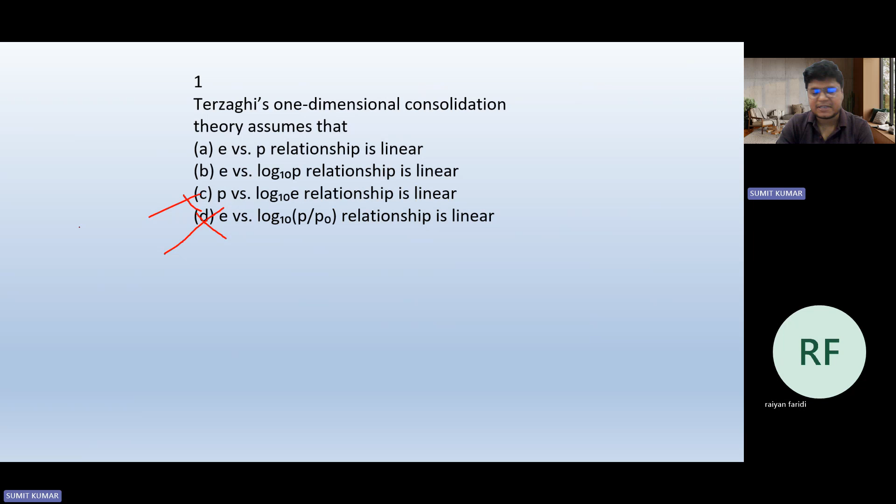As we move forward, you will see AV is delta E, that is change in the void ratio, divided by delta P. Then we have the coefficient of volume compressibility, that is MV. MV equal to AV by 1 plus

E naught, where E naught is the initial void ratio, and CC and CR, depending upon whether it is the compression index or recompression index, each delta E upon log P2 by P1. Maybe at some point I could write something wrong, but I feel this might be log P1 by P2, but as I recall, it's log P2 by P1.

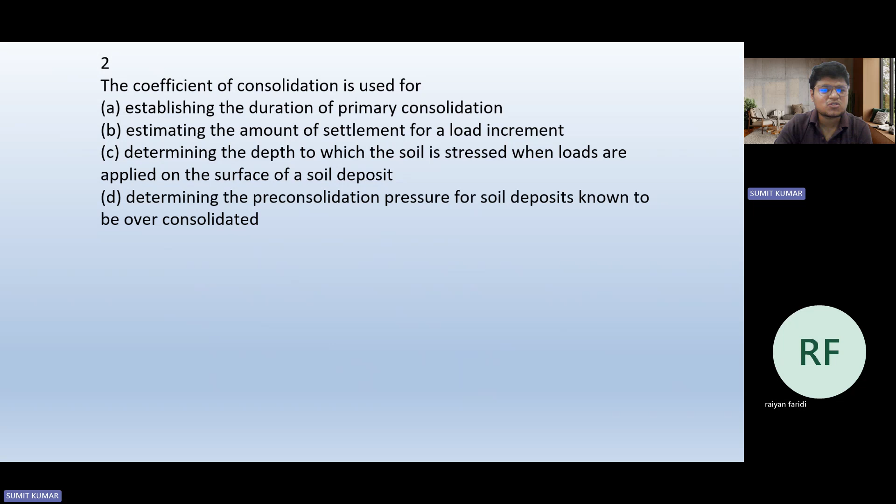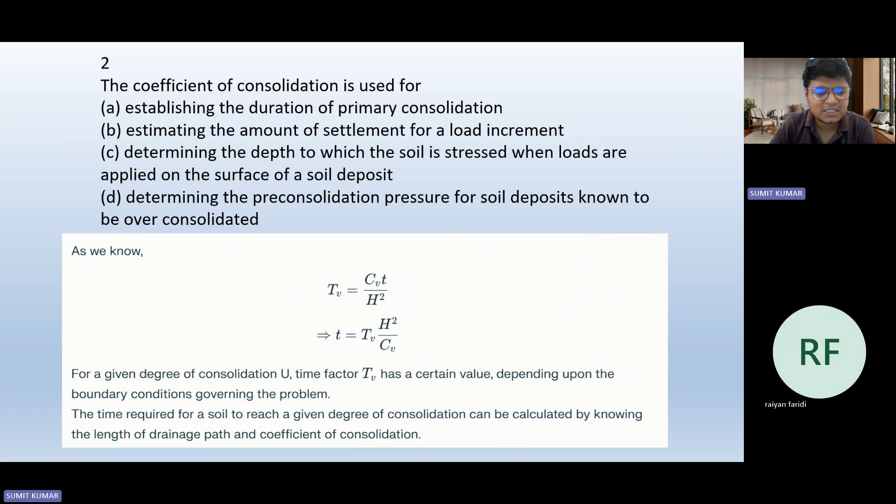So for this question, the option number A or B should be correct. Let me read once again. The question says the coefficient of consolidation is used for establishing the duration of primary consolidation, or establishment of amount of settlement for a load increment. So option number A will be correct.

Next is the true/false question, in which it is asked that 50% of the consolidation at a site subjected to a stress level of 200 kPa occurred in 2 months. If the site had been loaded to 400 kilopascal, the 50% consolidation would occur in 4 months. Now see, it's a very simple, very basic question.

Suppose, let's take an example that you have applied 1 kilonewton of load to move an object from one place to another, and it will take t amount of time. So if you applied 2 kilonewton of load instead of 1 kilonewton, to move that object from one place to other, it will take less time, not more time.

That is, it could take t by 2. So basically it is not related in exactly that manner, but from common sense also, you could not say that when you increase the load from 200 to 400, the 50% consolidation settlement achievement takes 4 months. If you apply more stress, it should take less time than earlier. So this is clearly false, and I don't want to go into detail now, because as we move forward we will solve more problems and this will be clear to you. But these type of problems come in many competitive examinations, and students don't think critically, and they mark the wrong option.

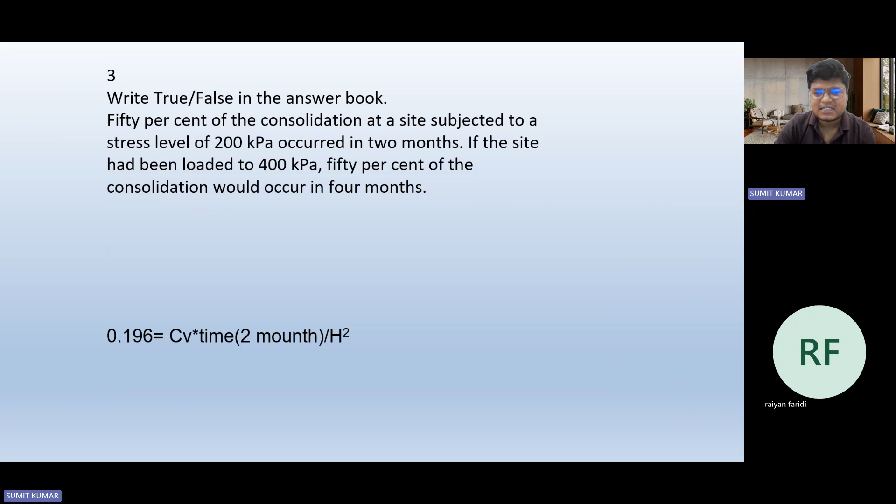So I will suggest that you read the question very carefully. Sometimes in a question, just by reading it you need not touch the pen, and you would be able to answer the question. So this option is the false statement. And the relation which we used, if you remember, in some class I have shown you that...

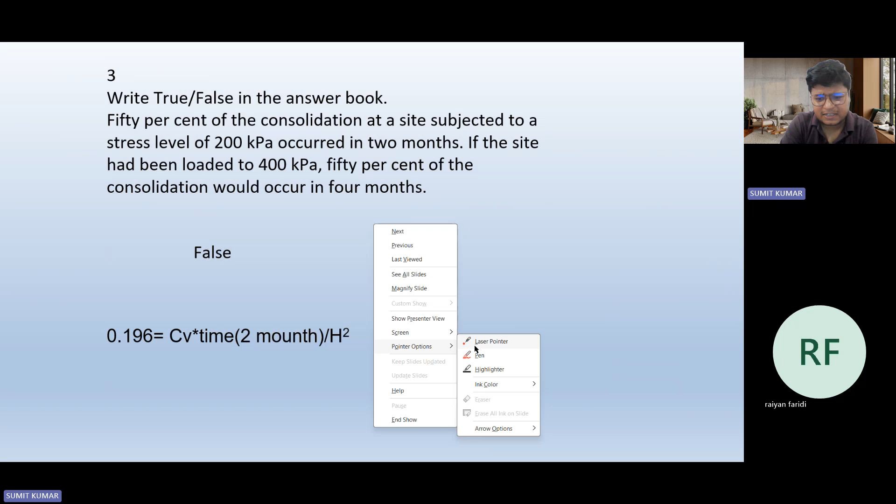For 50% consolidation settlement, Tv value is Tv equal to Cv into T, where Cv into T by D square, where T is the time, and this Tv is 0.196 for 50% consolidation settlement. For 60% it is 0.283, something like that, as I recall. And for 90% it is like 0.848 or something.

Just check once. This is there in the table which PDF I have shared in the last to last class, so just check once. And these values, how we have calculated, we have elaborated over there. But as we move forward in this class, we will discuss this again and again, because many problems come on this topic only. That's why I write this formula many times, so that it will be remembered by you.

So moving forward you could be able to answer the problem associated with the same, right? Now, this is the first statement and how you have understood. So if you go for any examinations, specifically the competitive examination, you see many of the problems don't require you to touch the pen or to solve anything. Just read the question and answer the question and move forward.

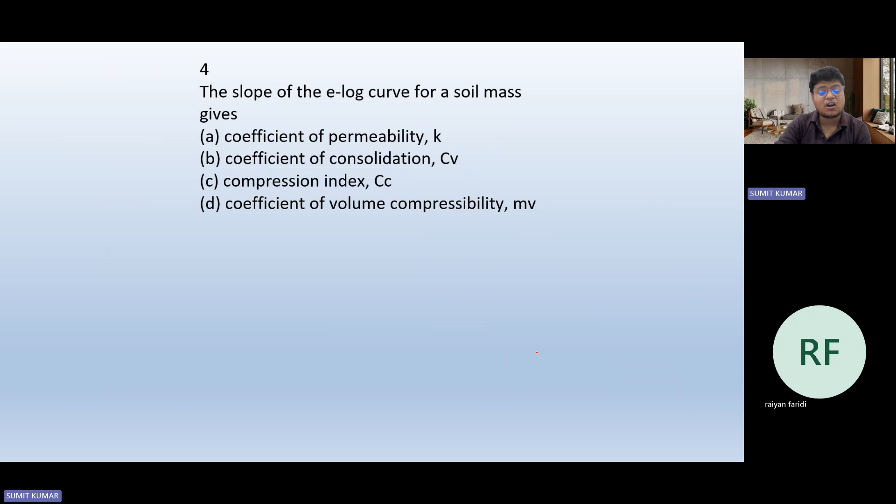Now over here, the next question says the slope of the e-log curve for the soil mass gives Cc value, compression index. How? Let me show you. If you remember, I have written some of this in this class only. In this class only, I have written Cc equal to delta e upon log P2 by P1.

When we plot these graphs it comes to be linear, but when we plot this in terms of e versus P, this comes to be some arc, maybe an arc of a parabola or something like that curve. So over here, if you recall the last to last class, over there we have shown the figure as well, in which we have shown that this relation comes to be linear for the log curve, e versus log curve, while this linear relation comes to be in the form of an arc when we plot e versus P, or e versus sigma, whatever you want to say.

Right. Now the next question says sand drains are used to: reduce the settlement, accelerate the consolidation, increase the permeability, or transfer the load. So if you read this, you could say that it could lead to reduce the settlement, but whether it is possible that the settlement is reduced due to... in the due course of time, it could not reduce the settlement.

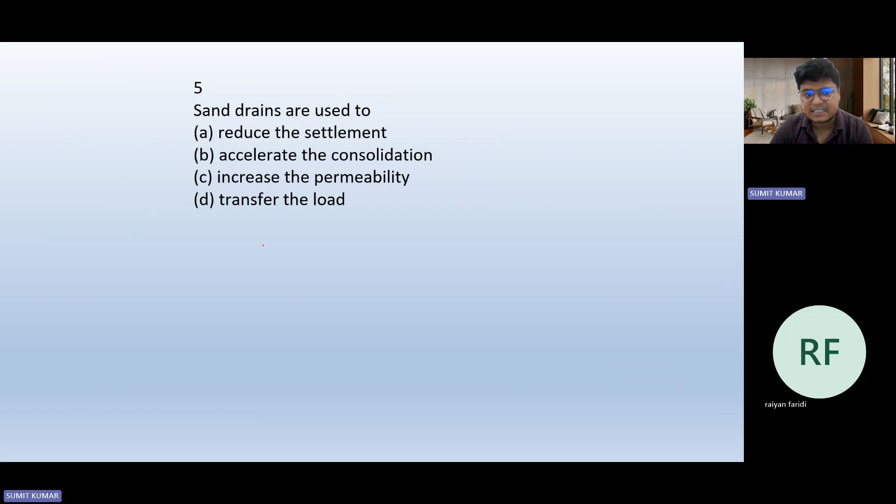Yeah, accelerate the consolidation - if you remember, in the previous class I have drawn a figure, a table in which I have shown that the clay layer is there, above that a sand layer is there, and below that also a sand layer is there. In that circumstance, the settlement takes place at a faster rate, that means the water flows out from there at a faster pace. But in the same scenario, if you remember, we have also said that if below that clay layer some impervious layer is there and above that clay layer a sand layer is there, the consolidation settlement takes place, but the time taken by the consolidation settlement gets increased.

So option B seems to be correct. Now see option C - it says increase the permeability. You can't increase the permeability of a specific soil in any circumstances, and then transfer the load is not part of the options at all. So option B is the correct answer.

This elaboration is sufficient, and some points are written. Let me read it: the slow rate of consolidation of saturated clay of low permeability may be accelerated by means of vertical sand drains, which provide radial drainage, resulting in shortening of the drainage path. Consolidation is then mainly due to horizontal radial drainage, resulting in faster dissipation of excess pore water pressure. Now let's move to the next problem.

This problem I discussed in the previous class, but I could not speak fluently and I feel I could not convey my point properly. So let me read this question again and elaborate.

For curve 1, it reaches a specific value, then the axial strain increases, but sigma 1 minus sigma 3, that is the shear stress parameter, remains constant for the increase in axial strain, or may even reduce.

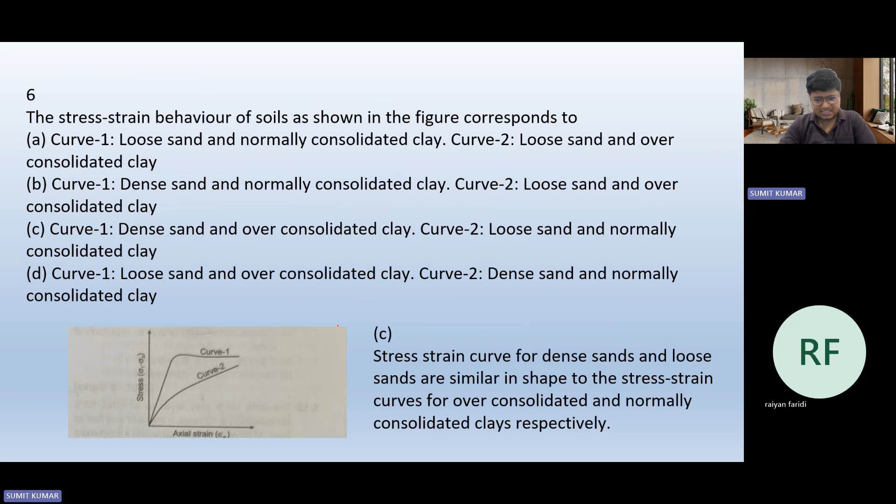Now the next problem: the time for a clay layer to achieve 90% consolidation is 15 years. The time required to achieve 90% consolidation if the clay layer were twice as thick, 3 times more permeable, and 4 times more compressible would be?

The answer I already solved over here. Let me show and discuss it, because due to time constraints I don't want to take too much time, as I have to discuss many things. Otherwise I will write with pen and paper and elaborate separately, but if needed, I will write.

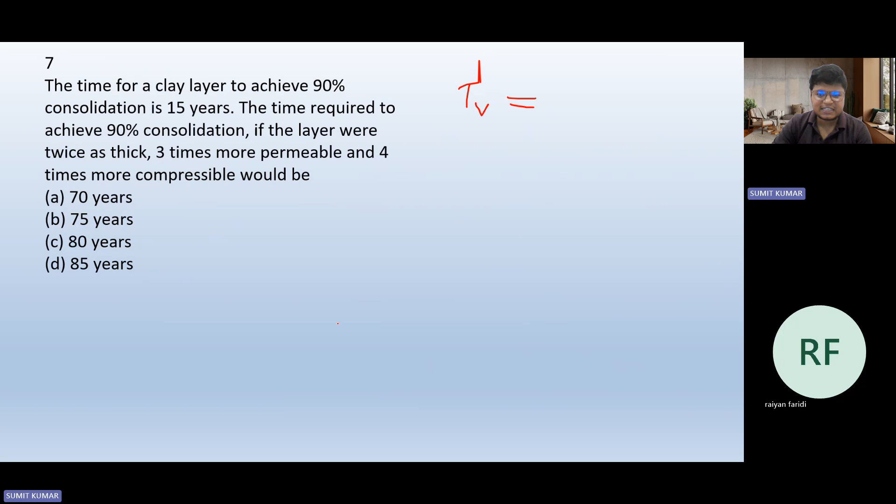If you remember, I have written this term many times: TV equal to CV into T by D square. Now, the question says 90% consolidation. If you remember, for 90% consolidation, the correlation is TV equal to, let me write that.

Which option is there? If you remember, TV equal to 1.781 minus 0.9332 log of (100 minus percent U). If you calculate this, keeping U as 90, this value comes out to be 0.848, as I recall.

Okay, so TV is known to us. TV 0.848 is constant. Now the question says that to achieve 90% consolidation, the time for the clay layer is 15 years. It takes T equals 15 years.

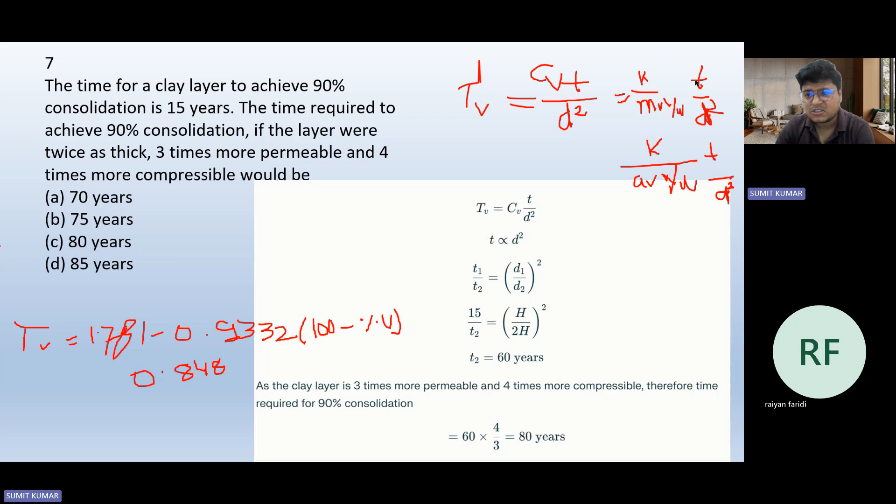But you need to understand that solving in that manner will give a more precise answer. So I suggest this formula will be there; you solve in that way and you will get the answer as given here, or maybe something different. I could not see the answer script, but during solving I think I missed out things like permeability and compressibility. So I will solve and put the answer over there. If I'm not able to solve, the question and the formula I have written will be there, so I suggest you solve using these concepts and you will get the correct answer.

Now see the next question: consolidation in soil is a function of effective stress. Absolutely right, it does not depend on the pore water pressure alone - that doesn't make sense if it's a function of effective stress, because effective stress is also a function of pore water pressure, since pore water pressure could be subtracted and is a function of total stress. So option A is the correct answer because effective stress fulfills both the pore water pressure and total stress relation, since total stress minus pore water pressure is the effective stress.

So the correct answer is option A, and the explanation mentioned is that Terzaghi stated that effective stress controls the behavior of the soil like the compression and the strength. The compression is a function of effective stress. By using the principle of effective stress, Terzaghi derived the consolidation theory for saturated soil.

Now move to the next problem. The next problem says identify the two false statements from the following four statements. The first statement is that consolidation of the soil happens due to change in total stress, effective stress basically - this is not right in the true sense.

When the standard penetration tests are performed in fine sands below the water table, the dilation correction is applied after the overburden correction. Maybe the next point is that over-consolidated clay will have predominantly cohesive strength as compared to frictional strength - you could say that.

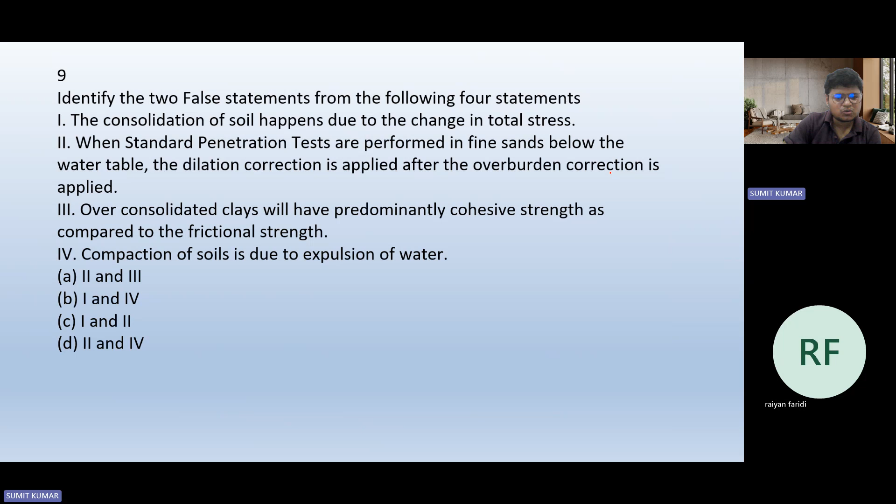But the compaction of soil is due to the expulsion of water, so option 4 is correct... wait, option 1 is correct, that consolidation of soil happens due to change in stress. So option B is correct over here - sorry, option 4 is false and option 1 is false.

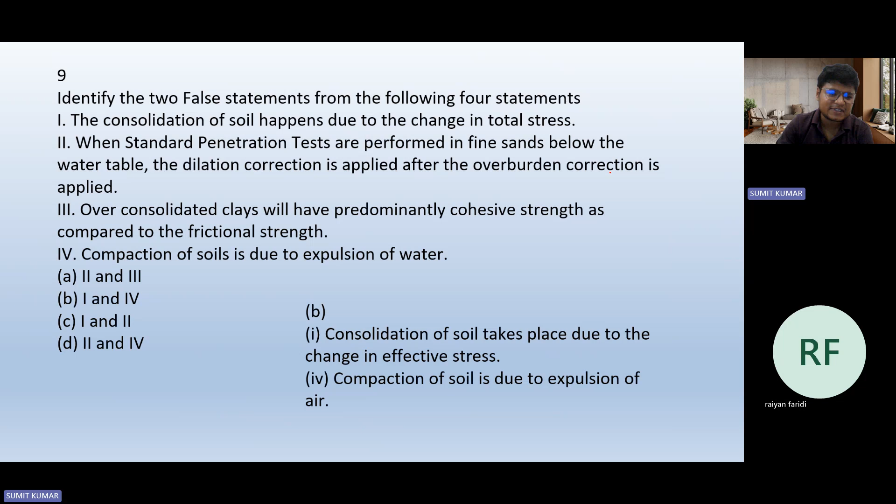Option 2 is correct and option 3 is correct, because when the standard penetration test takes place, we perform the dilation correction, and in option 3, over-consolidated clay will have predominantly cohesive strength as compared to frictional strength. This is because in over-consolidated clay, the clay body has been compressed to such an extent that the stress applied in the present situation is less than the stress applied in the prehistorical time at that specific site. So these two statements are correct, and option 1 and option 4 seem to be false.

Now the next question says the time for a clay layer to achieve 85% consolidation is 10 years. If the layer was half as thick, 10 times more permeable, and 4 times more compressible, then the time required to achieve the same degree of consolidation is...

Okay, no problem, let's see. Over here, what I have discussed earlier is mentioned in that manner only.

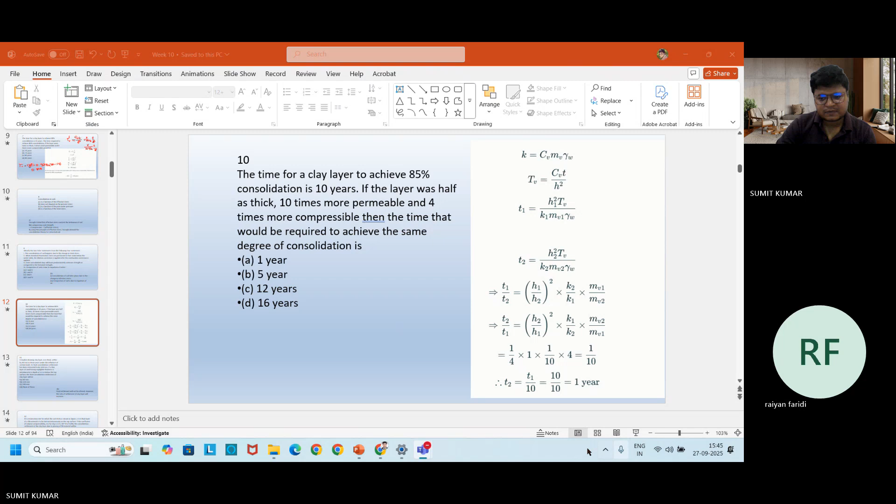Now see, over here it is mentioned that the time for a clay layer to achieve 85% consolidation is 10 years. If the layer was half as thick, 10 times more permeable, and 4 times more compressible, find the time required to achieve the same degree of consolidation.

As I mentioned earlier, TV equal to CV into T by D square, and CV equal to K by MV gamma W. From this equation, K equal to CV into MV gamma W, that is, CV equal to K by MV gamma W. So TV equal to CV into T by H square. If we write CV as K by MV gamma W, then T is related as H1 square into TV upon K1 into MV1 into gamma W.

Now for time T2, which we need to calculate: H2 is half of H1, since the layer is half as thick. It is 10 times more permeable, so K2 by K1 is 10, and 4 times more compressible, so MV2 by MV1 is also 4. When we calculate, this comes out to be 1 year.

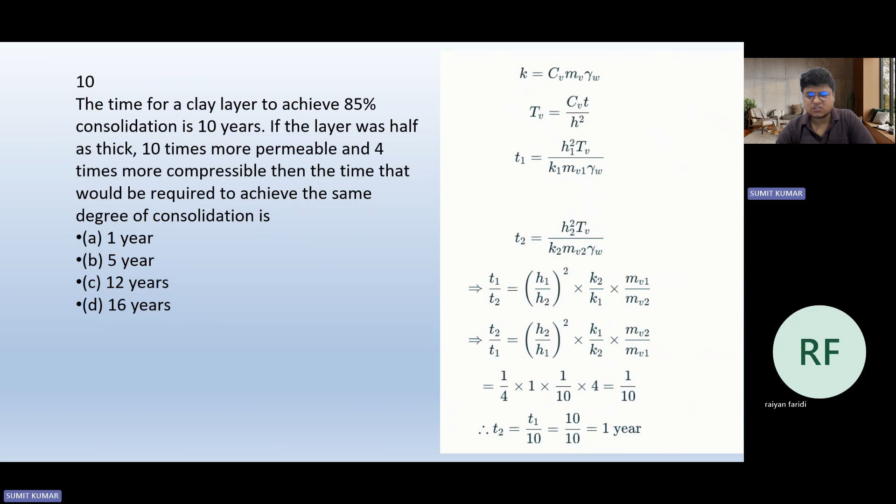Right now the answer has been presented over there, and what we are discussing right now is this problem, and the solution is also very much clear for one and all.

Now see, the next problem says a double draining clay layer 6 meters thick settles by 30 mm in 3 years under the influence of a certain load. Its final consolidation settlement has been estimated to be 120 mm. If a thin layer of sand having negligible thickness is introduced at a depth of 1.5 meters below the top surface, the final consolidation settlement of the clay layer will be?

This is similar to the earlier problem where one-way drainage was there; now two-way drainage gets developed, so the thickness changes in that proportion only. You see the solution which is already there, so it's directly written.

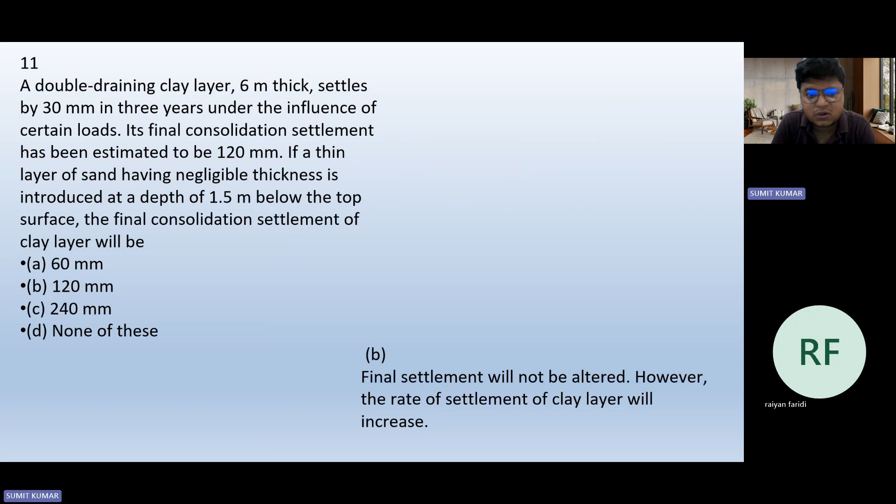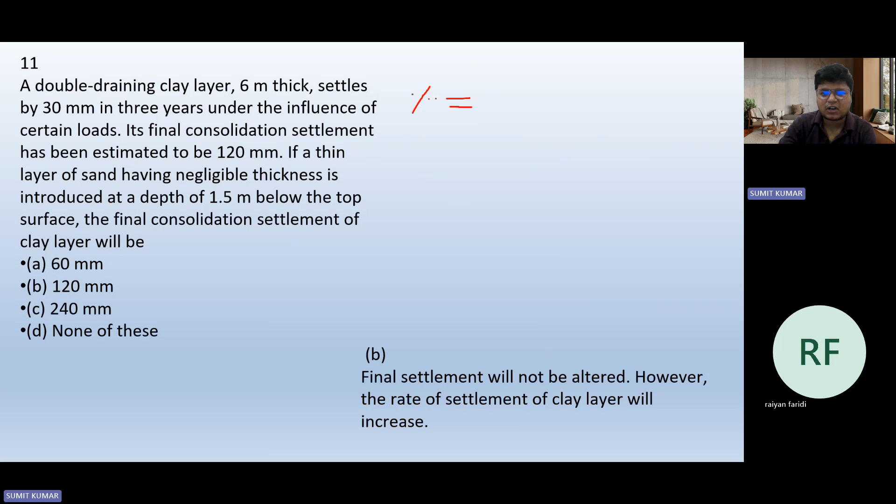It is said, okay, over here it talks about the final settlement. So what point does this question want to develop? That the ultimate settlement -- if you remember, we have said that percentage U, we calculate delta h, we calculate TV. For that we are calculating percentage U, that is nothing but delta h, and on the basis of that we calculate TV, delta h upon capital delta H.

So this capital delta H remains constant irrespective of anything. When we calculate small delta h, that is the settlement at a specific time. If small delta h is, say, 20 mm and capital delta H is 100 mm, then percentage U is 20%. So what I'm asking here is about the final consolidation settlement -- that ultimately is capital delta H only, and that remains constant irrespective of the time taken to achieve that consolidation settlement. So the final settlement will not be altered; however, the rate of settlement of the clay layer will increase due to the implementation of a sand layer.

Now see this problem: it is asked that at a reclamation site for which the soil strata is shown in the figure, a 3 meter thick layer of fill material is to be laid instantaneously on the top surface, if the coefficient of volume compressibility MV for clay is 2.2 into 10 to the power minus 4 meter square per kilonewton.

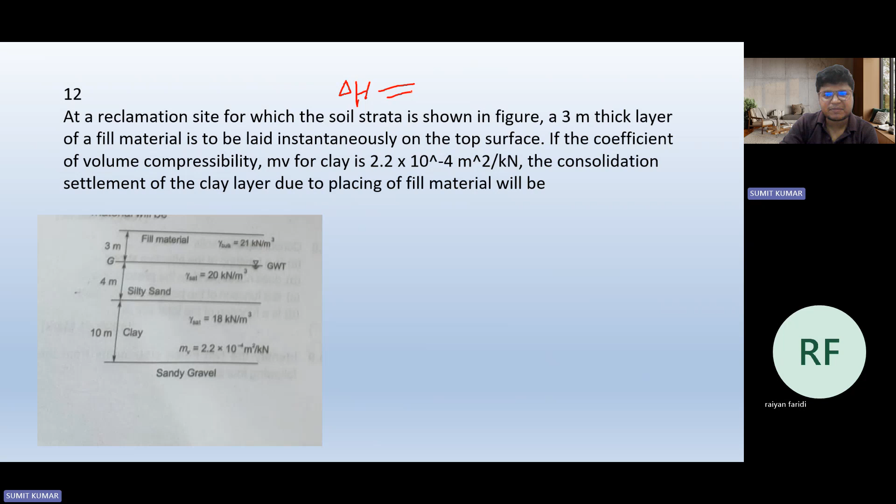The consolidation settlement of the clay layer is due to placing of fill material. Let me write the relation we use to calculate the total settlement in terms of volume compressibility: delta H equals H, the thickness of the compressible clay layer, multiplied by MV, the coefficient of volume compressibility, multiplied by delta sigma.

At a reclamation site, the strata is shown in figure. The compressible layer is clay with a thickness of 10 meters. A 3-meter thick layer of fill material is laid instantaneously on the top surface. The coefficient of volume compressibility is 2.2 into 10 to the power minus 4. The consolidation settlement needs to be found. The fill material has unit weight 21 kilonewton per meter cube, so delta sigma equals 21 into 3 equals 63, multiplied by 2.2 into 10 to the power minus 4 gives a unitless value, then multiplied by 10 into 1000 gives the total settlement in mm.

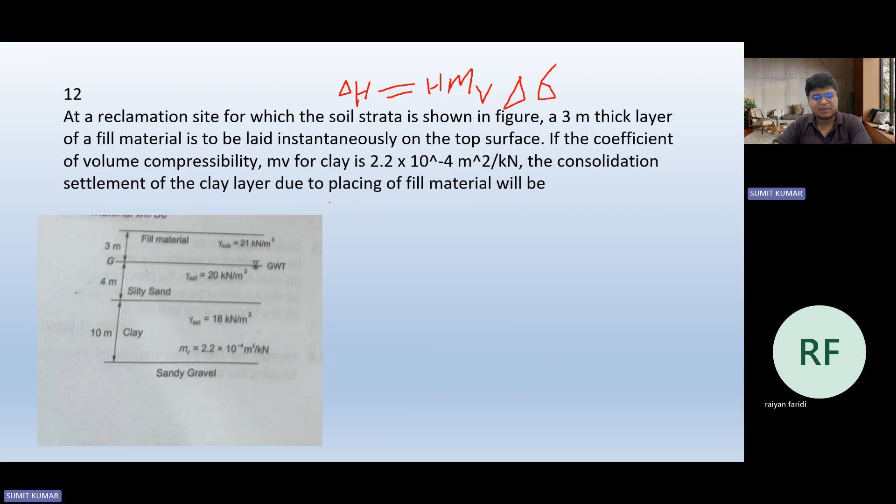See the calculation. First, delta sigma is calculated, which comes out to be 3 into 21, that is equal to 63. Followed by the relation discussed above, that is H naught into MV into delta sigma, which comes out to be 0.1386 multiplied by 1000. That value comes out to be nearly 139 mm as the total settlement achieved using these correlations.

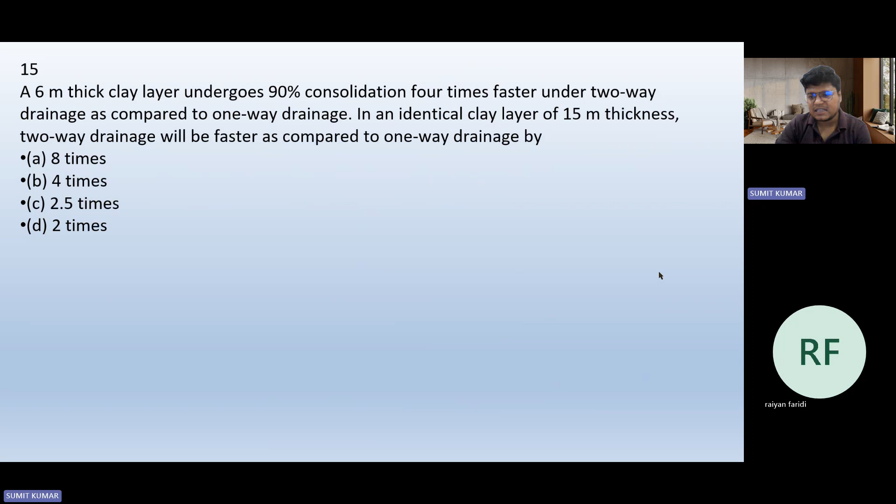Now let me leave you with this problem. I suggest you try to solve this. We are taking a short break of 5 minutes, and we will start again in 5 minutes.

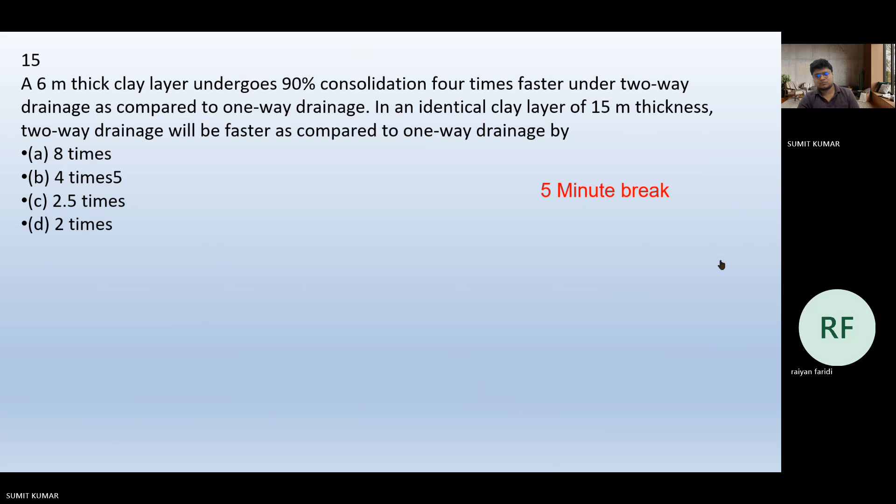Okay, so what we are discussing, this question is given: a 6-meter thick clay layer undergoes 90% consolidation 4 times faster under two-way drainage compared to one-way drainage. In an identical clay layer of 15-meter thickness, two-way drainage will be faster than one-way drainage by how much? I have the solution for this. Now we have less time, so we will go a little faster.

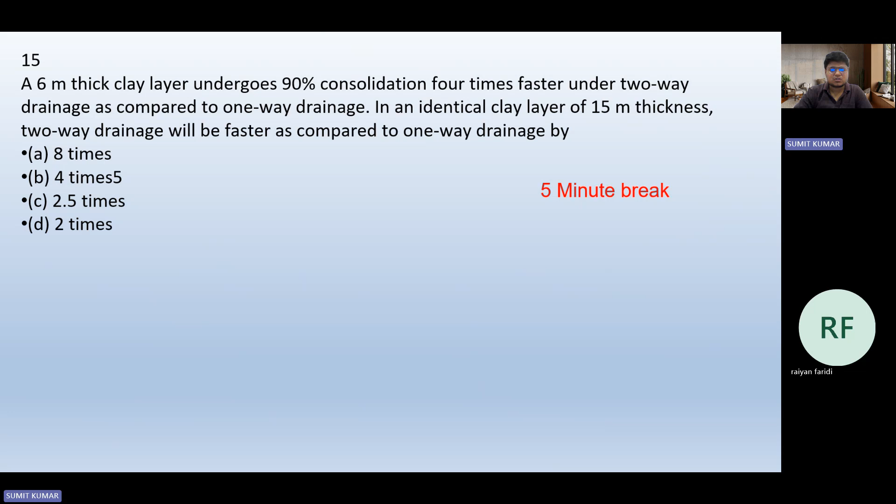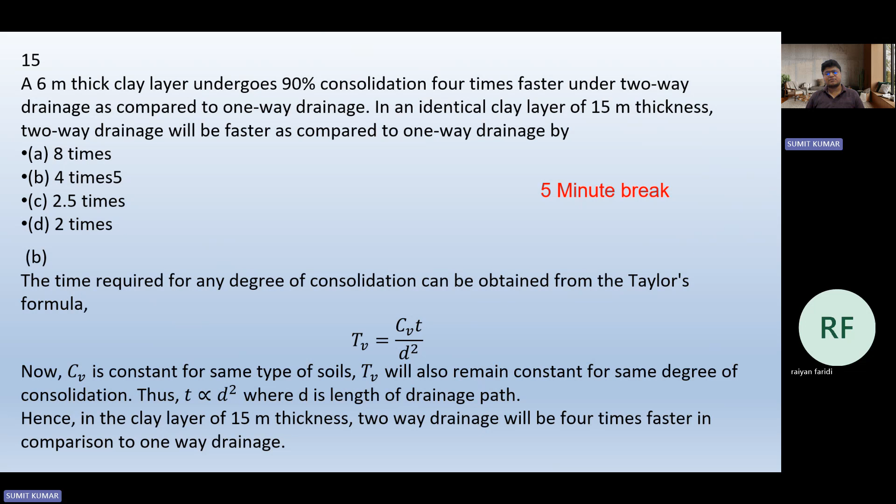It is mentioned that the time required for any degree of consolidation follows Taylor's formula, that is Tv equals Cv into t by d square, and as Cv is constant for the same type of soil, Tv also remains constant for the same degree of consolidation. So time t is proportional to d square, where d is the length of the drainage path, that is thickness. Hence, in the clay layer of 15-meter thickness, two-way drainage will be 4 times faster compared to one-way drainage. So option B is the correct answer.

Next is the linked answer question 4.17 and 4.18. Both questions are based on this concept only, with the figure uploaded. It is mentioned that the average effective overburden pressure on the 10-meter thick homogeneous saturated clay layer is 150 kPa. A consolidation test on an undisturbed soil sample taken from the clay layer showed that the void ratio decreased from 0.6 to 0.5 by increasing the stress from 100 to 300 kPa. The initial void ratio of the clay layer is asked.

First, it is asked in that manner. We are going to use delta E by log P2 by P1. It is given that the void ratio changes from 0.6 to 0.5, and we need the initial void ratio. We calculate Cc as E1 minus E2 divided by log 10 of sigma 2 upon sigma 1, that is 0.6 minus 0.5 divided by log 300 by 100, which comes out to be 0.2096, the coefficient of compression. Now this Cc value is equated with E1 minus E naught, that is 0.6 minus E naught, divided by log corresponding to 150, that is asked, so log 150 by 100, and the E naught value is calculated as 0.563.

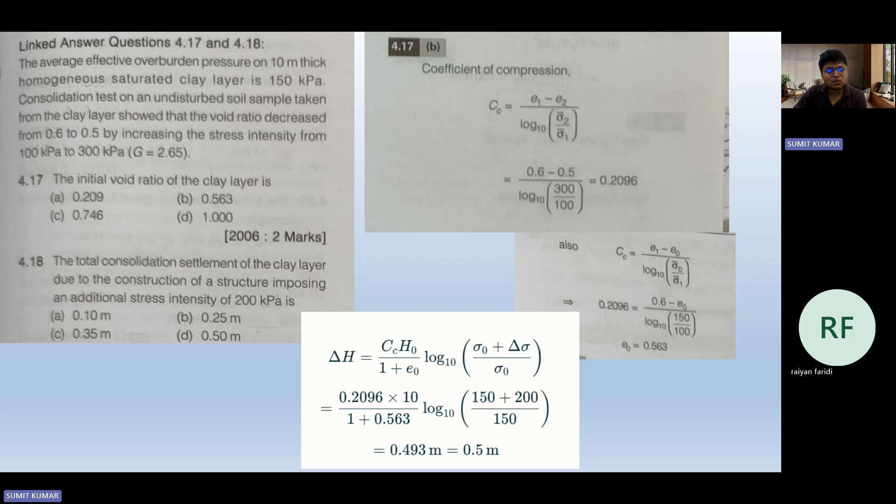Sigma naught is 150, value of e naught is calculated as 0.563. So we use that correlation for the soil thickness of 10 meters, mentioned in the first statement of the question, that is the average effective overburden pressure on the 10-meter thick homogeneous saturated clay layer. So delta H equals Cc into H naught by 1 plus e naught, log 10 of sigma naught plus delta sigma by sigma naught, and that value comes out to be 0.5 meter. Hence both problems, 4.17 and 4.18, get solved.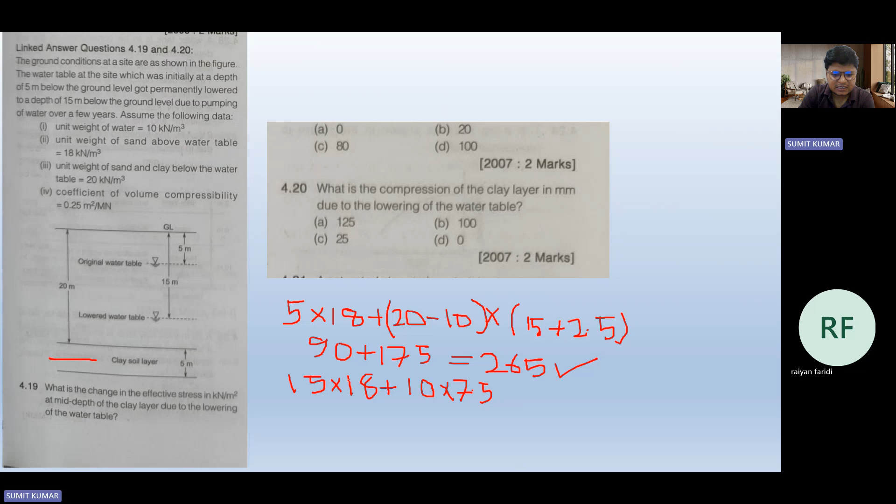Later it becomes 15 multiplied by 18, plus 10, that is 20 minus 10, multiplied by 5 into 2, 5 plus 2.5 means 7.5. So 180 plus 90 means 270, plus 75, that comes out to be 345. Now we take 345 minus 265.

15 into 18 plus 10 into 7.5. 15 into 18 is 270, plus 75 gives 345. This difference comes out to be 80 kilonewton per meter square. So this is going to be our answer, option C. Option C is the correct answer for this.

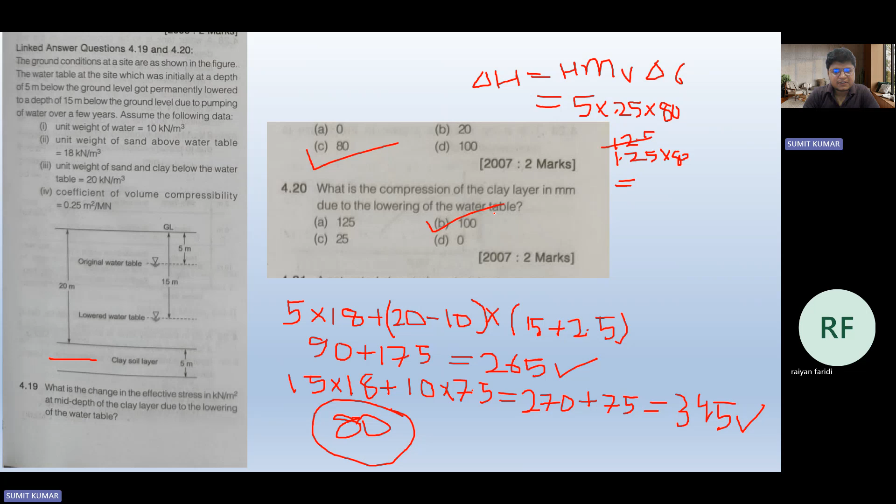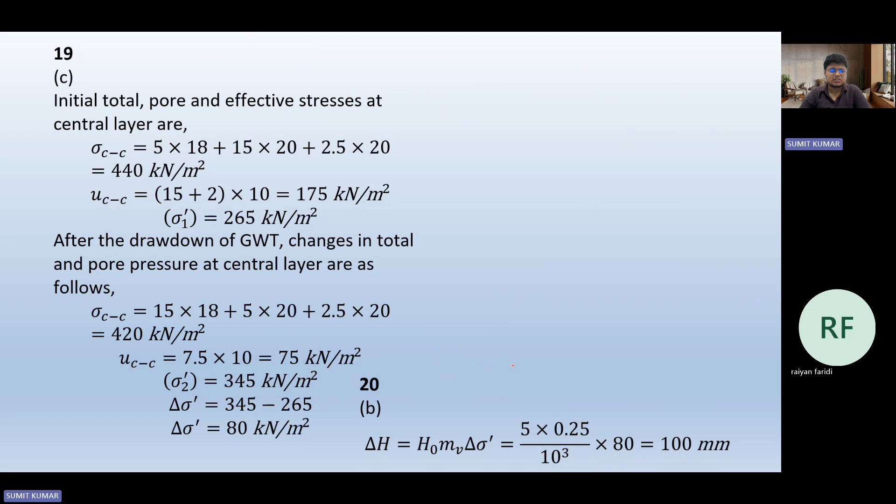So this value is 100 mm, and option B is the correct answer. The same is solved over here as well. Delta sigma dash comes out to be 80, and the second part of the problem, the settlement comes out to be 100 mm. So things are very much clear, I have done the solution, and if you see the detailed solution, the same things come out. So there is no confusion in the basic understanding of the thing.

Now we move to our next problem. A saturated clay stratum draining both at the top and bottom undergoes 50% consolidation in 16 years under the applied load. If an additional drainage layer were present, find the time for 50% consolidation. This is a repetition of the previous solved problem. It takes 1 by 4 times, that is 4 years, as I recall, because the same type of problem is there.

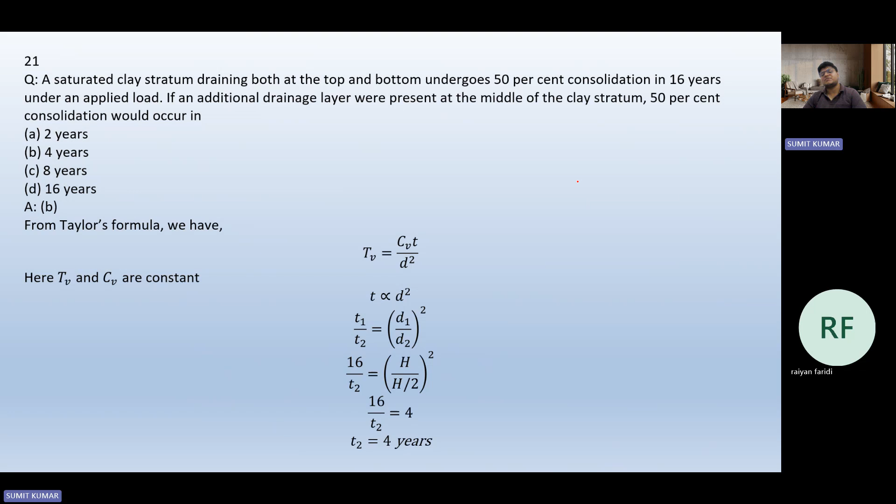So is option B correct? Yes, B option is correct, and again it uses the same concept that T is proportional to D square. Over here, permeability or other factors don't show any dependence, so TV remains constant, CV remains constant for the same clay. So T is proportional to D square. Here D2 gets converted into H by 2 due to presence of a drainage layer, so T2 also gets converted into 1 by 4 times in that proportion, which comes out to be 4 years.

Now the next problem says a saturated undisturbed sample of clay strata has a moisture content of 22.22% and specific gravity of 2.7. Assume gamma W equal to 10, and find the void ratio and the saturated unit weight of the clay respectively.

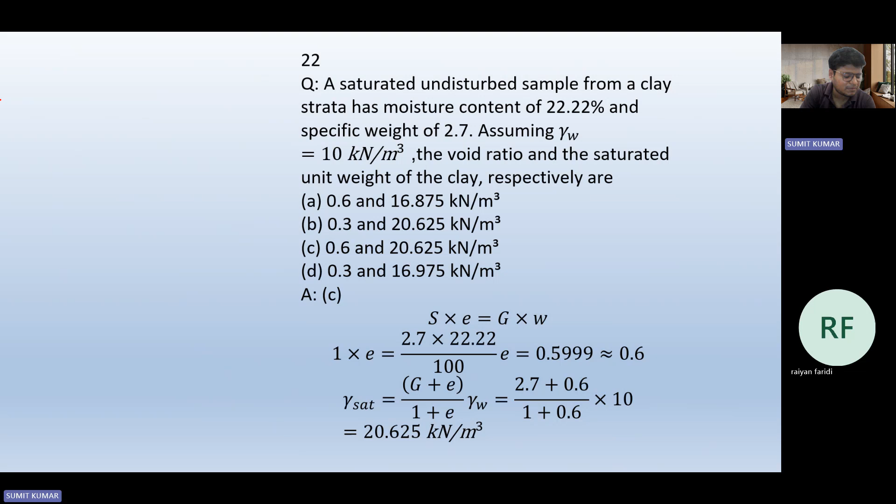First of all, use S e equal to G W, and calculate the void ratio. S equal to WG, so S is 1, E needs to be calculated, G is 2.7 and W is 22.22, that is 0.2222. So E comes out to be 0.6. For the second part of the problem, the saturated unit weight is G plus E by 1 plus E into gamma W. G is known, E is calculated, 1 plus E is used, and that comes out to be 20.625. So it's a very simple problem, anyone can solve it.

Now this problem is somewhat interesting. It asks that using the property of the clay layer derived from the previous question, which we solved, calculate the consolidation settlement of the same clay layer under the square footing, neglecting its self weight, with the additional data shown in the figure below. Assume the stress distribution as one horizontal, two vertical. So we need to calculate in that order.

So over here the settlement needs to be calculated. A 200 load is applied, so the stress comes out to be delta sigma. First we have to calculate the thickness at the center of the clay layer. This is the center, and if the original thickness is B, then that thickness becomes B plus 2NZ.

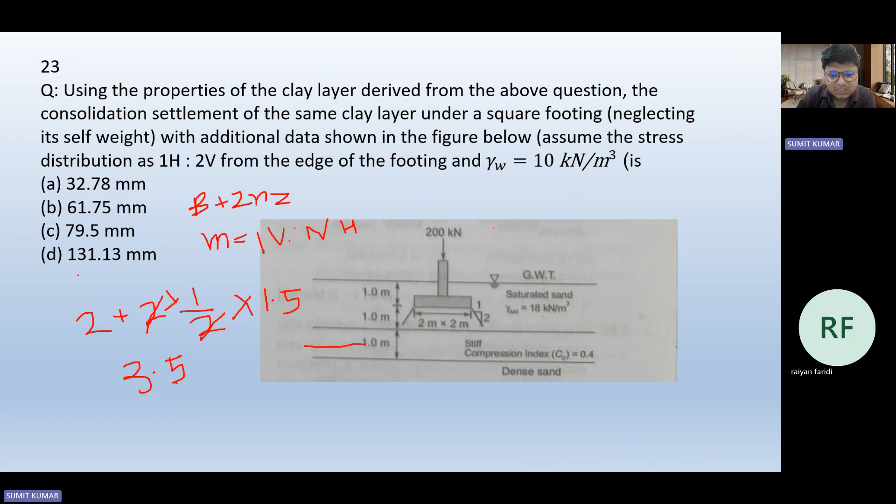Z is that depth, and N is nothing but the ratio of one vertical to N horizontal. Here it is two vertical, one horizontal, so N becomes 1 by 2. So B plus 2NZ, N is 1 by 2, and Z comes out to be 1 meter plus 0.5, that is 1.5. The twos get cancelled, and that value becomes 3.5. When we divide 200 by this, because it is square, 200 upon 3.5 square comes out to be 16 or so, which is delta sigma.

Now we need to calculate sigma. So sigma at that portion comes out to be 18, considering saturated sand, dense sand, and clay with stiff compression. This layer is 18 only, so that is calculated over here.

You can see that delta sigma is 200 by 3.5 square, and effective stress is 18 minus 10 into 2, plus which we calculated over here, 20.625. So 20.625 minus 10 into 0.5, and that comes out to be 21.31.

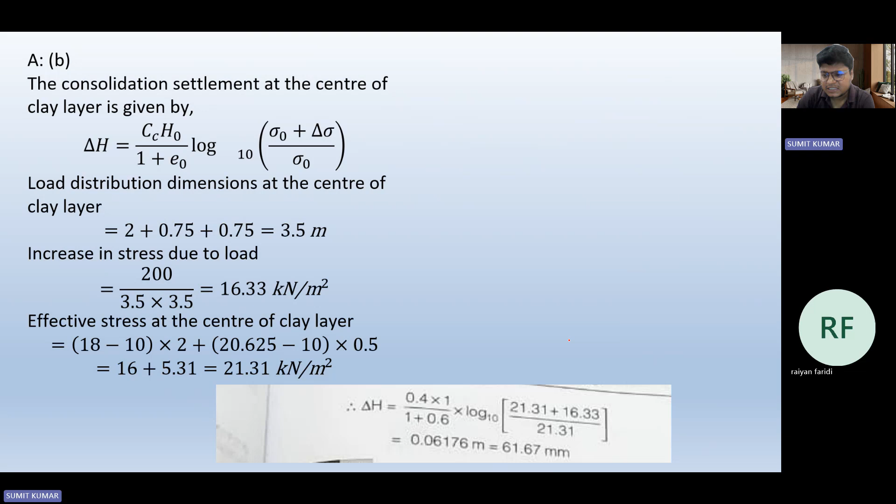Now we have calculated overall delta H as 0.4 into 1 by 1 plus 0.6 into log 21.31 plus 16.33 by 21.31. That comes out to be 61.67 mm, right? I think so, things are very much clear. So both parts of the answer are solved.

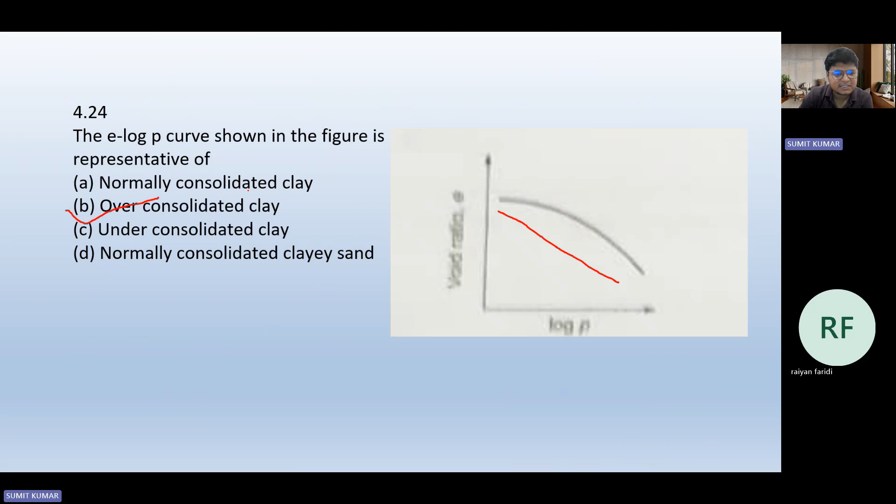Now over here, the E versus log P curve shown in the figure is the representation of it. If it is a curve, and not a straight line, then the E-log P curve must be over consolidated clay. If it is normally consolidated, this line needs to be linear. Hence option B is the correct answer. I have discussed this in detail earlier in the class.

Now next problem. Again a similar problem in which a drainage layer is applied in the center, so time gets reduced by 1 by 4. Let me read the question, and you could answer without touching pen and paper, as we have discussed this problem 3 more times. So again, the question basically says T is proportional to D square.

Identical surcharges are placed at the ground surface at sites X and Y with the soil conditions shown alongside, and the water table at the ground surface. The silty clay layers X and Y are identical. The thin sand layer at Y is continuous and free draining with large discharge capacity. If the primary consolidation at X is estimated to complete in 36 months, what would be the time required to complete the primary consolidation at Y?

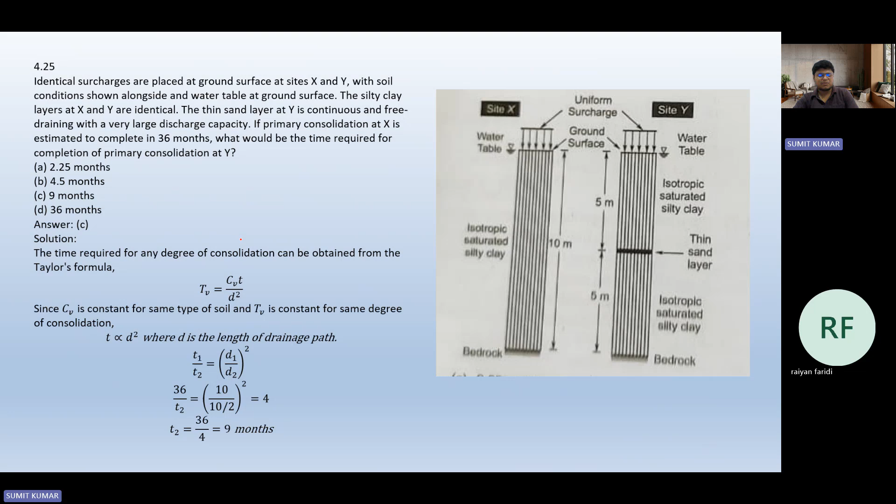Again, the layer is present between them, so time gets reduced by 1 by 4 times. So the answer is 9 months. Detailed description of this question is mentioned over here. I suggest you look into that if you remember and understood the previous two problems. This problem is nothing for all of you.

Now, the next question says that a layer of normally consolidated saturated silty clay of 1 meter thickness is subjected to one dimensional consolidation under a pressure increment of 20 kPa.

The properties of soil are specific gravity 2.7, natural moisture content 45%, and the compression index CC is 0.45, the recompression index is 0.05, and the initial average effective stress is 100 kPa. Assuming Terzaghi's theory to be applicable, find the primary consolidation settlement.

So over here, recompression index and compression index both are mentioned. So what do we need to calculate? We have to calculate the total settlement. So I am not going to solve it over here, the solution is mentioned over here.

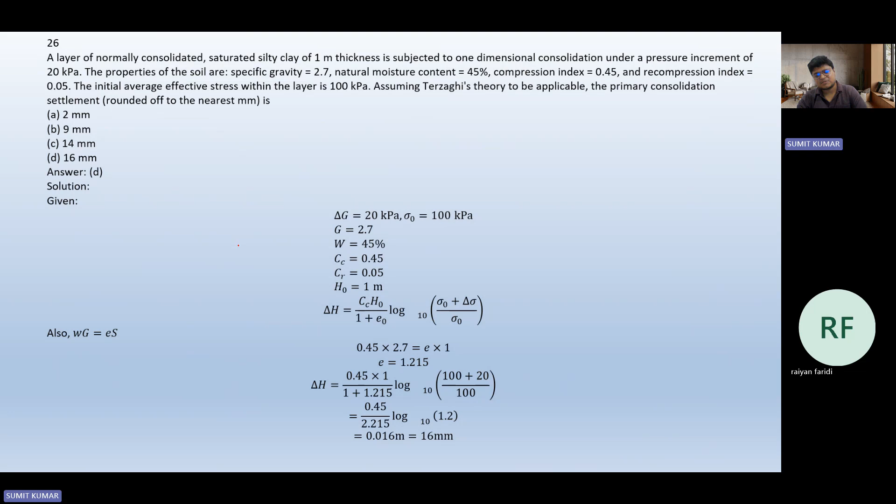Starting with, first of all, we have calculated delta H as CC into H0 by 1 plus E naught, log of sigma naught plus delta sigma by sigma naught, because CR is just a dummy data. And when we calculate it, it comes out to be 16 mm.

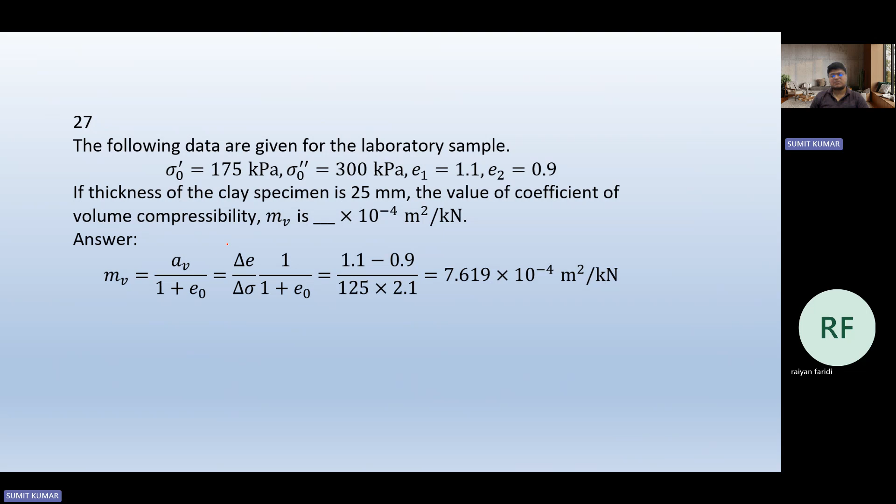Very simple problem. Next problem is one in which sigma naught dash, sigma naught double dash, and E2 are all mentioned, and we are asked to calculate the volume compressibility. That comes out to be AV by 1 plus E naught, and AV is delta E by delta sigma, so 1.1 minus 0.9 divided by 300 minus 175, that is AV, divided by 1 plus E naught, which is 1 plus 1.1, and that answer comes out to be MV. So it is calculated in the similar fashion as I have stated orally at this point.

Now you can see the next problem in which it's mentioned that a water tank is constructed on the soil deposit shown in the figure below. A circular footing of diameter 3 meter and depth 1 meter has been designed to take the entire load of 1500 kilonewton. Assume the unit weight of water as 10 kilonewton per meter cube and the load dispersion pattern as two vertical, one horizontal. Find the expected settlement of the tank due to primary consolidation of the clay layer.

So again, this is a similar problem to what we have discussed earlier. Let me give you the solution and suggest you do it by yourself. It's a very simple problem which we have repeated over here at this point.

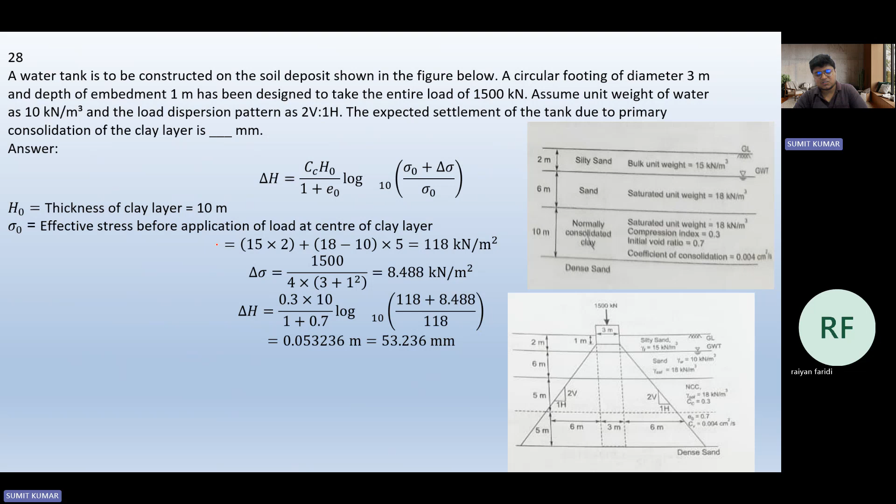Next question again asks how much time it will take to achieve the consolidation settlement when a 3 meter thick layer is subjected to an initial uniform pore pressure of 145 kPa as shown in the figure. So for the given ground conditions, find the time in days, to the nearest integer, required for 90% consolidation.

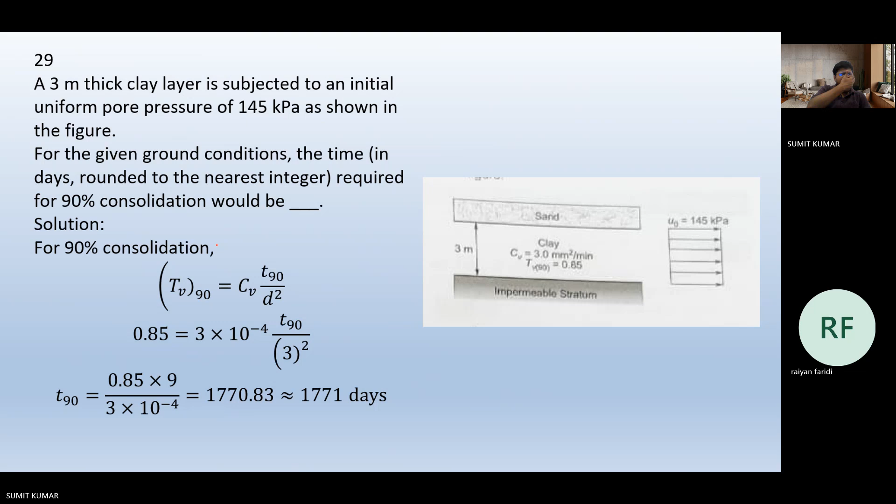So again, we use the same concept Tv equal to Cv into T by D square, where we use Tv as 0.85 and calculated the t90 as 1771 days.

The next and last part of the problem says that the void ratio of soil is 0.55 at an effective normal stress of 40 kPa. The compression index of soil is 0.25. In order to reduce the void ratio to 0.4, we need to find the increase in the magnitude of effective normal stress. So again, we use the relation delta H equal to H naught into delta E by 1 plus E naught, and we have ultimately calculated delta sigma as 417.35 kPa.

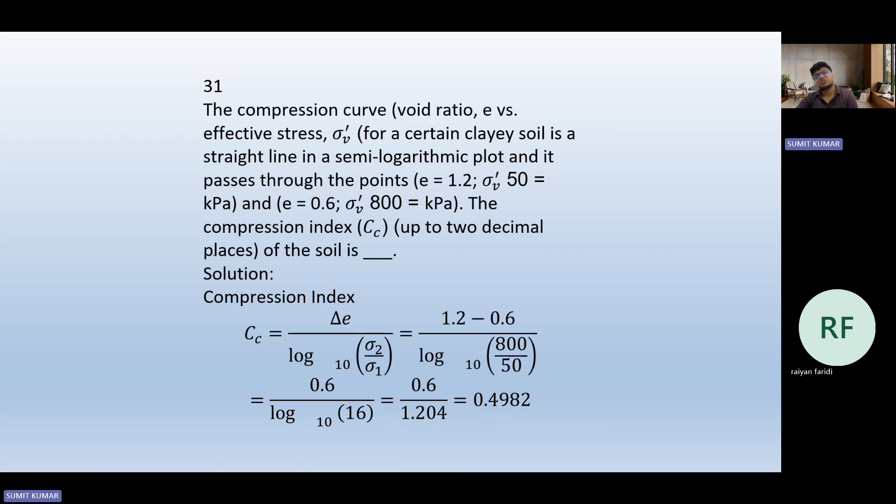Now the next problem is regarding the compression curve, and again it uses the same correlation which I have written in the very first slide of this class, in which it is mentioned that the compression curve, void ratio E versus the effective stress sigma V dash for a certain clay soil, is a straight line in the semi-logarithmic plot, and it passes through the point E equal to 1.2, sigma V dash equal to 50 kPa, and E equal to 0.6, sigma V dash equal to 800 kPa. The compression index Cc is nothing but delta E by log sigma 2 by sigma 1. So we have calculated that it comes out to be 0.4982.

So with this, the question part which I wanted to discuss in this class comes to an end.

Now we will move to some concepts which I want to cover before summing up today's class. Very briefly, we will go step by step and discuss some outcomes which come in our way during these discussions. So the first thing we are going to talk about over here is earth pressure and retaining walls. Let's see what we are going to discuss. Give me a minute.

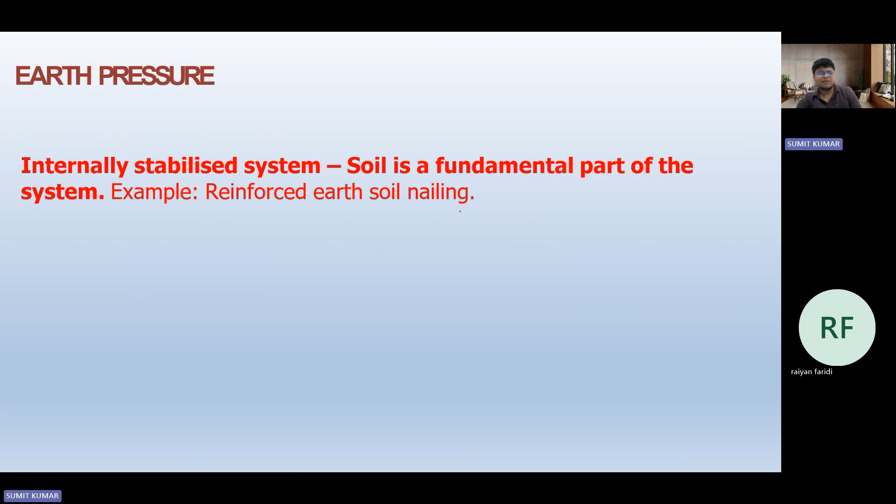Additionally, in-situ walls, either cantilever, braced, or tie-back sheet pile walls, and then soldier pile walls. Moving ahead, in an internally stabilized system, soil is the fundamental part of the system. Some examples are reinforced earth and soil nailing.

Now talking about earth pressure, when we move to earth pressure we talk about how the pressure acts on a wall when soil is there. The first point is: why does earth pressure need to be studied? It becomes very important because of the design of foundation walls, basements, safe excavation during construction, and design of earth retaining structures.

Talking about earth pressure types: earth pressure at rest, the K-naught condition, where the earth pressure coefficient is calculated as mu by 1 minus mu, or 1 minus sine phi. We will move ahead and see those correlations.

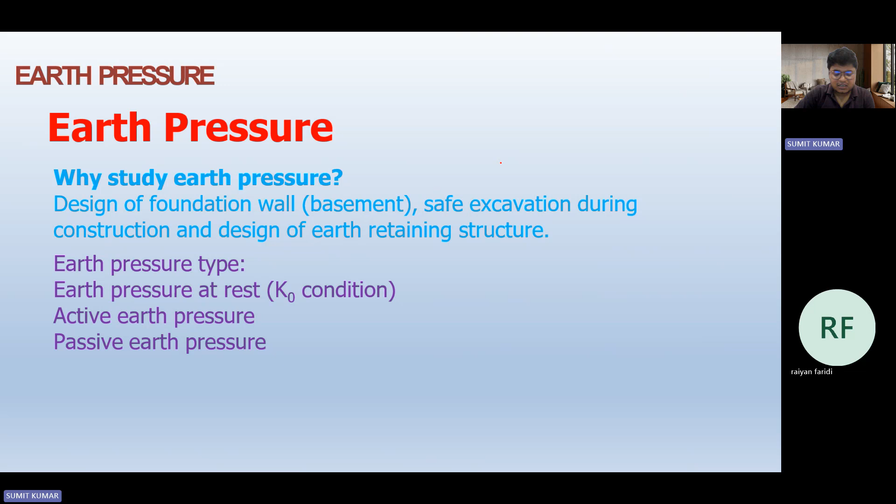The wall movement required to reach active pressure depends on the type of soil. For dense sand, the movement is 0.001h. For soft clay, it comes out to be 0.020h. The movement of the backfill in different directions is mentioned accordingly.

Now let's consider active and passive cases. Starting with the active case, when the wall moves out, it is moving away from the backfill. In this condition, the shear stress on the failure plane reduces, and the lateral pressure also reduces. The minimum lateral stress is achieved when the soil fails and full strength is mobilized.

The second one is the passive case, in which the wall moves in, meaning the wall moves toward the backfill. The shear stress on the failure plane increases, the lateral earth pressure increases, so the maximum lateral stress is achieved when the soil fails and the strength is mobilized.

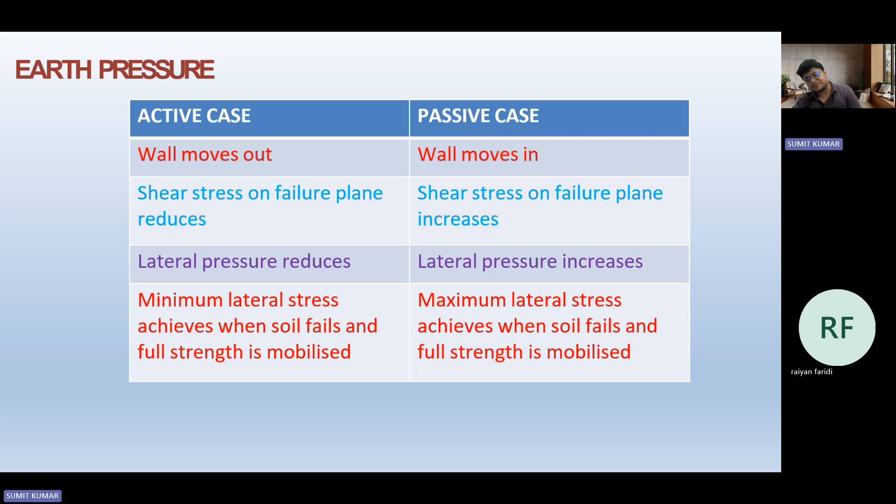Now let's see the pictorial presentation, starting with the lateral earth pressure at rest. It is assumed that sigma h by sigma v equals k naught, the coefficient of lateral earth pressure, for a rigid and unyielding wall, frictionless. So k naught equals 1 minus sine phi, or k naught equals mu by 1 minus mu, are two correlations mentioned earlier.

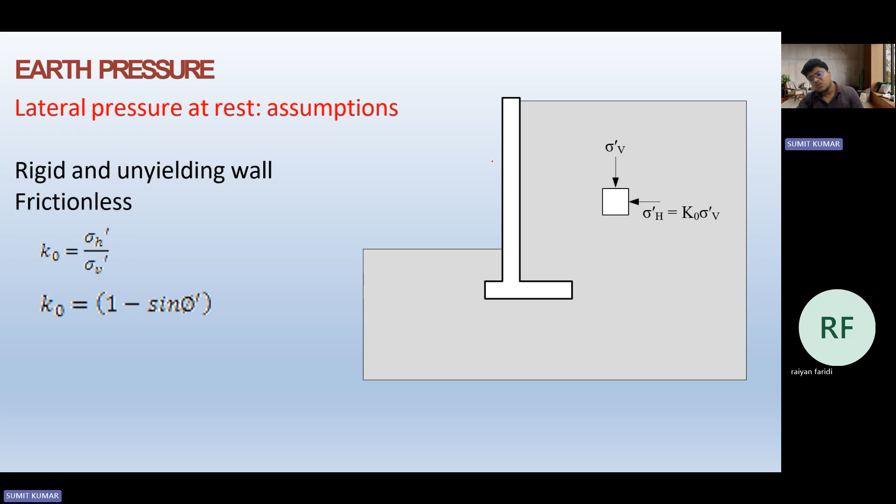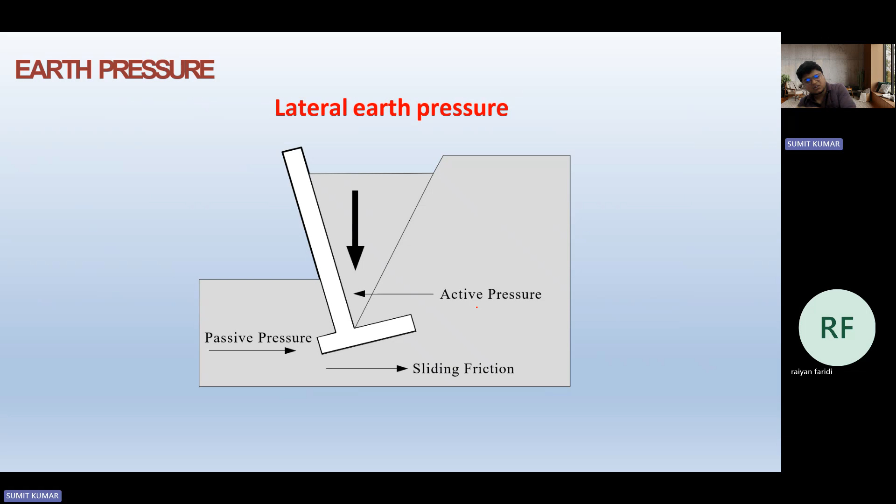Now consider the lateral earth pressure. In the active condition, the wall is moving away from the backfill, while in the passive pressure condition, the wall is moving toward the backfill. In one case the horizontal stress is felt only due to the vertical load, while in the second case it is due to the movement of the wall toward the backfill.

Let's see one by one as we move ahead. First, the earth pressure, active earth pressure, and passive earth pressure are presented. Moving away from the backfill is shown as active pressure, and moving toward the backfill is shown as passive earth pressure.

Now, in a descriptive manner, about the passive earth pressure, in which the retaining wall is moving toward the backfill. Hence the value of the passive earth pressure coefficient increases, up to 2 to 3 times, or maybe 10 times — for example, if ka is 1 by 3, kp comes out to be 3, and hence the pressure also increases in the same proportion.

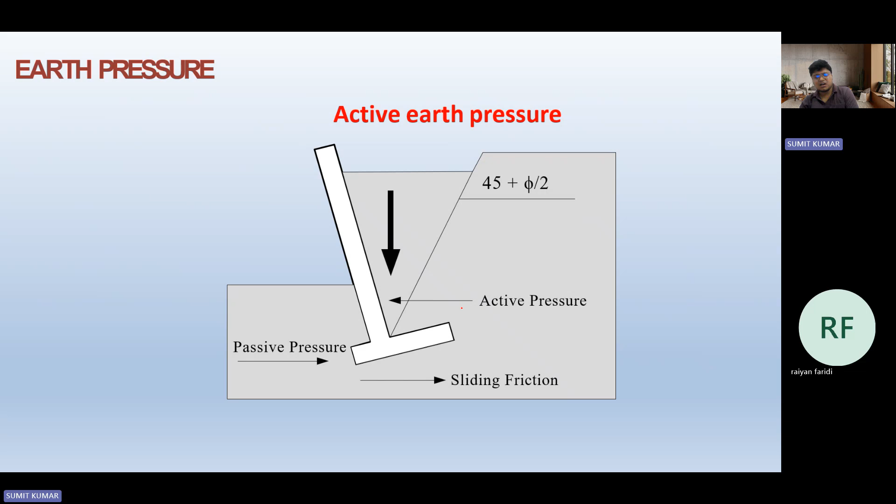Next is the active earth pressure. Again, the same graph is presented in a different manner. Let's see what more things we are going to cover, though I think these things get repeated.

We also use some wires to keep the connection so that failure doesn't take place, and this could lead to the passive conditions in which the earth pressure gets mobilized in terms of active and passive. The jack pressure, 0.65 k gamma h, is one of those correlations known by very few people.

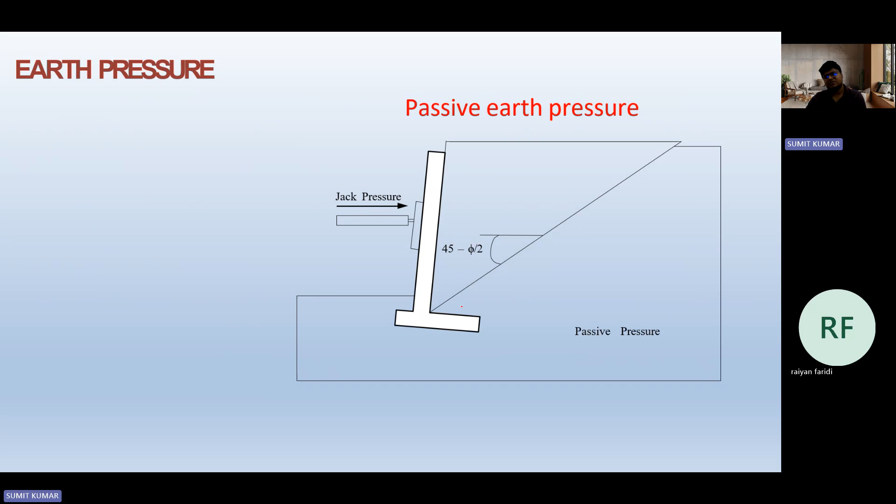Now you see some assumptions which we take in the earth pressure theory. Okay, give me a minute.

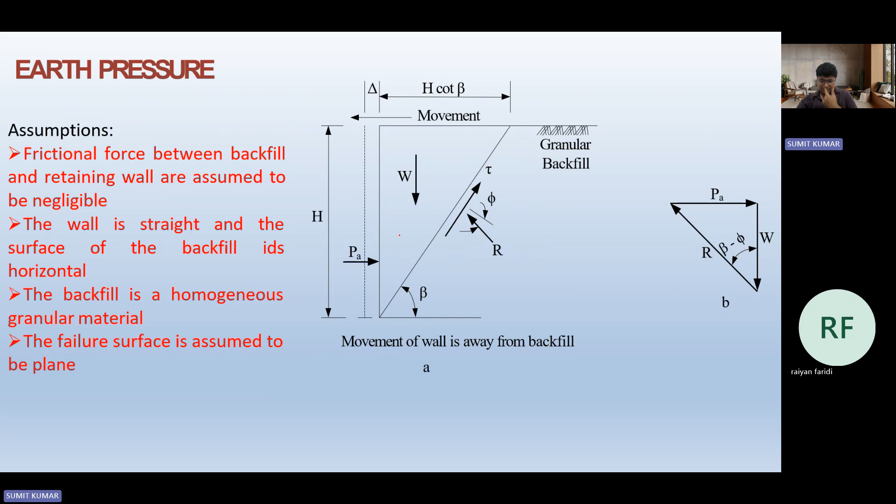The frictional force between the backfill and the retaining wall is assumed to be negligible, and the wall is straight and the surface of the backfill is horizontal. The backfill is also homogeneous granular material. These are some assumptions. Then the failure surface is assumed to be plane. These are only assumptions, not always the case.

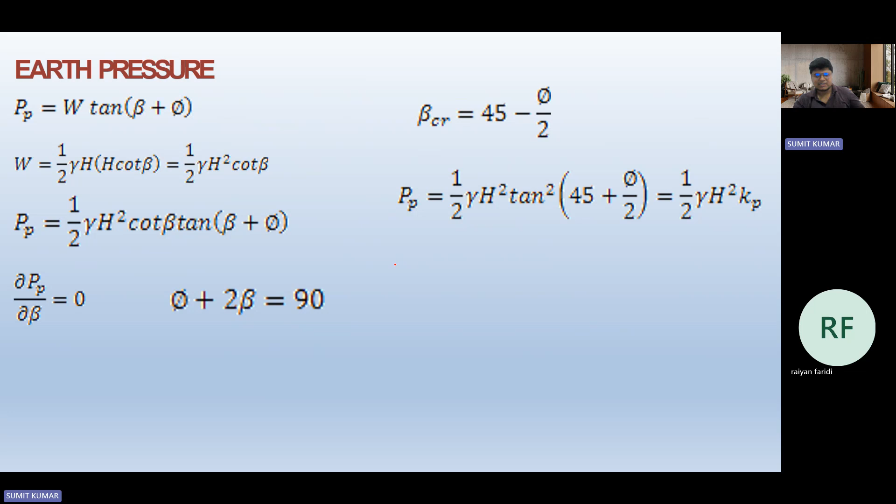Then some calculations are painted over here based on the picture. I'm not going to discuss that. These things are important, but not the point of discussion at this point of time. I will directly conclude how we calculate the earth pressure. Let me take a blank slide over here and explain the things for you.

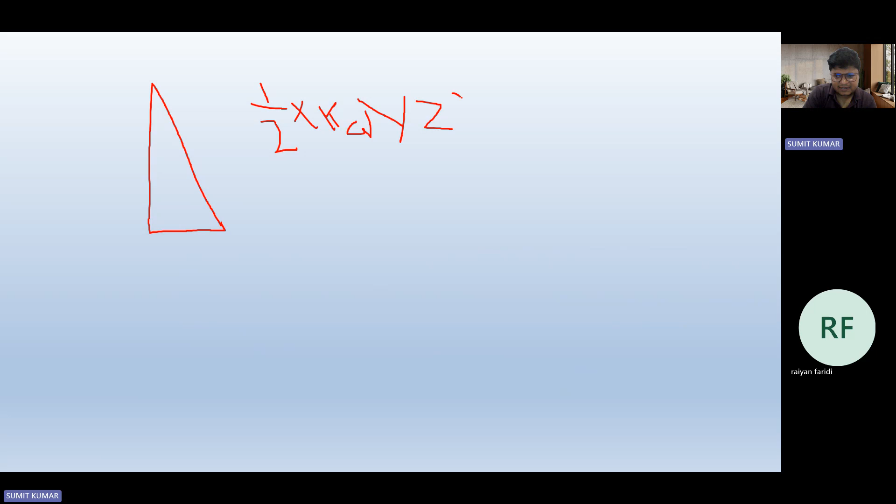In the earth pressure theory, one correlation is there: if this is the retaining wall, we draw it like this, and the stress acting comes out to be 1 by 2 into K into gamma Z or H, whatever you consider, square. That is the stress acting in this portion, and it acts at h by 3 from the bottom. That is what we have calculated.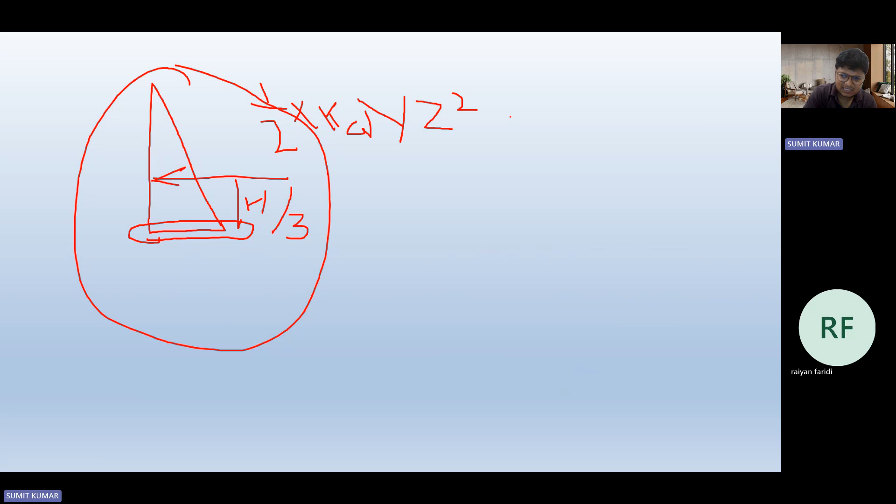And how do we calculate it? We simply calculate the stress. We draw the effective stress diagram and multiply the K value into that. Subsequently, when we calculate the earth pressure at any depth, we write K gamma z.

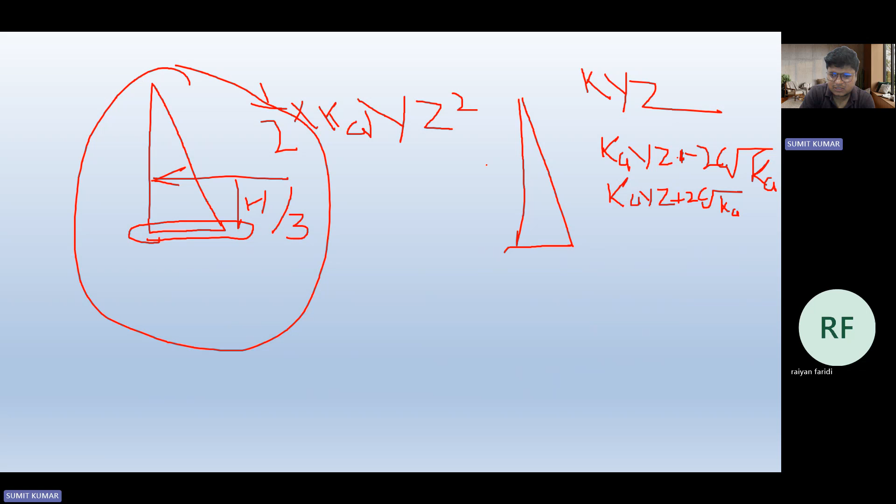But if cohesion is there, then Bell's theory comes into action, and over there we write K gamma z minus 2c root K for the active state, while this becomes K gamma z plus 2c root K for the passive state. So these are the only two things which we use, and I am not going to discuss the derivation of the same at this point of time.

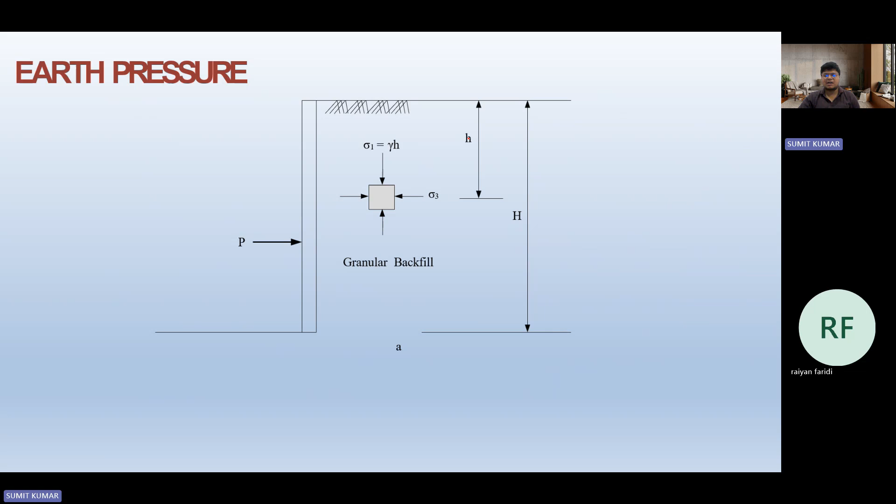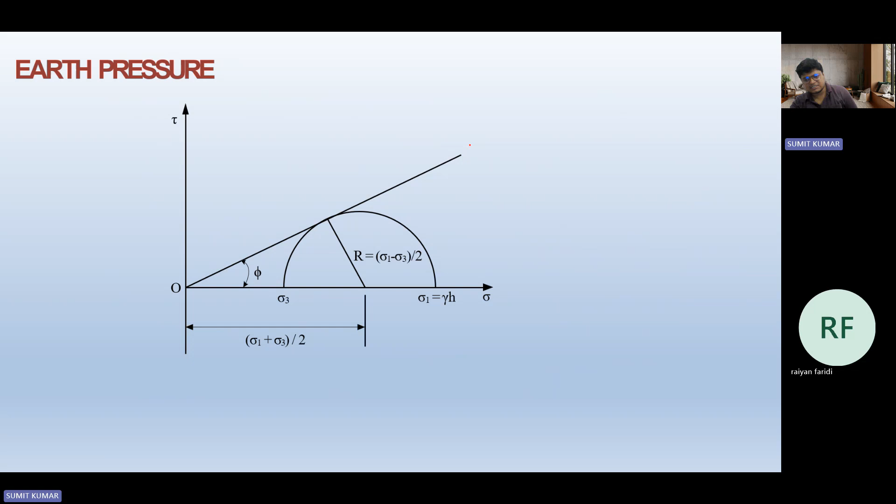Now you see over here what I want to show: we have considered the soil body at a specific depth h. On that, the horizontal stress acting is sigma 3, while the vertical stress at that specific section comes out to be gamma h, because gamma is the soil density and h is the depth. Those discussions are there, and I don't think these need further discussion, but one thing becomes important.

What is K? Basically, K, if you see K naught at one point of time, K is sigma h by sigma v, and this K value comes out to be 1 minus sine phi upon... you will see the derivation by yourself in a separate discussion. I am not interested in that because it is not very important. I am really interested in the concept. It is 1 minus sine phi upon 1 plus sine phi, or cot square of 45 plus phi by 2.

Similarly, Kp is 1 plus sine phi upon 1 minus sine phi. So these are the things through which we calculate Ka and Kp. And this Kp could also be written as tan square of 45 plus phi by 2, and what angle it makes with one another is also a point of discussion at a different interval. So those things are also there.

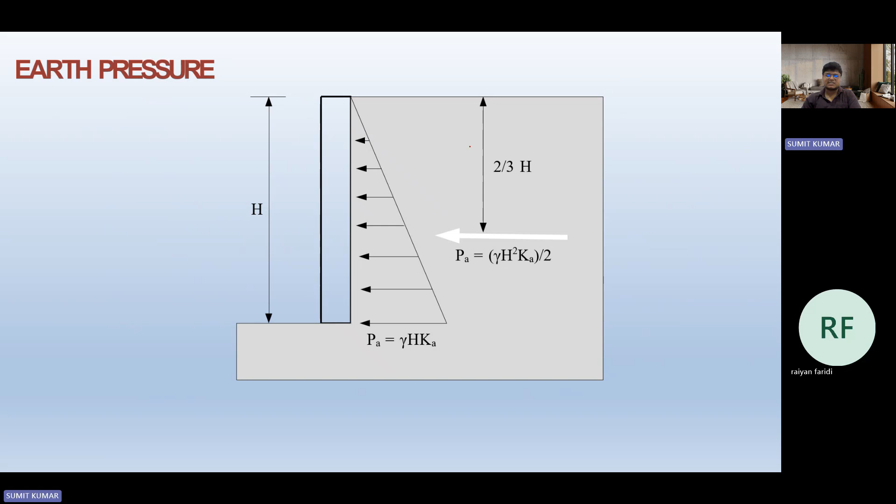Basically, we are calculating the area of earth pressure, which has been drawn over here. Subsequently, if the water table comes there, as you recall, the effective stress diagram gets transformed due to the presence of water table. Similarly, the earth pressure stress diagram also gets transformed.

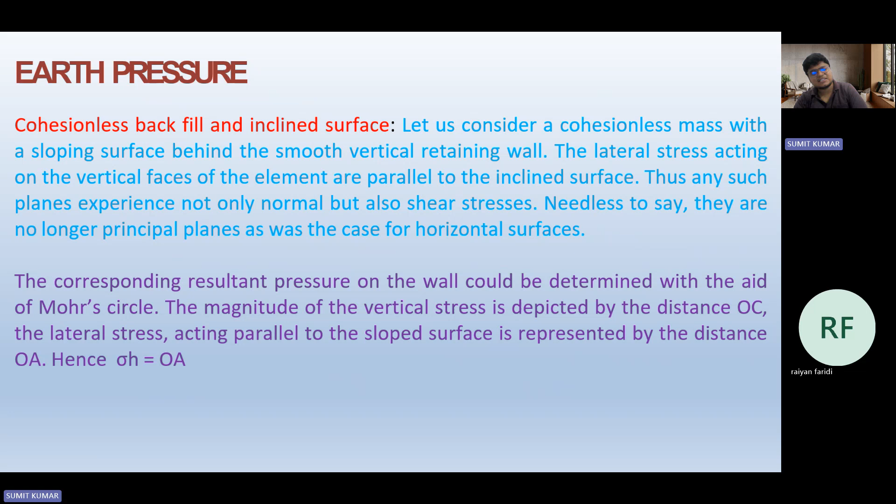Now, talking about the corresponding resultant pressure on the wall, it could be determined with the aid of the Mohr circle. The magnitude of vertical stress is depicted by distance OC, and the lateral stress acting parallel to the sloped surface is represented by distance OA, sigma h equals OA. So this is the explanation for this discussion.

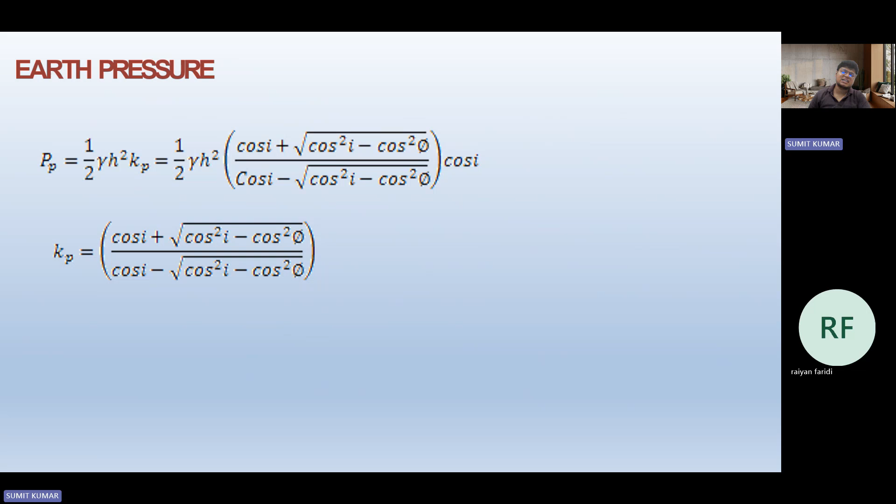Now we move to another part where the inclined backfill is also considered. The question arises that for the inclined backfill, the coefficient of active earth pressure is cos i minus root of cos square i minus cos square phi, over cos i plus root of cos square i minus cos square phi. Similarly for passive earth pressure, it gets reversed: the numerator becomes plus and denominator becomes minus. In the same fashion, we can calculate the passive earth pressure acting at the specific section.

The same points are mentioned again here. So I feel with this, we come up to the end of today's session. Some questions related to today's session will be taken up in the subsequent classes.